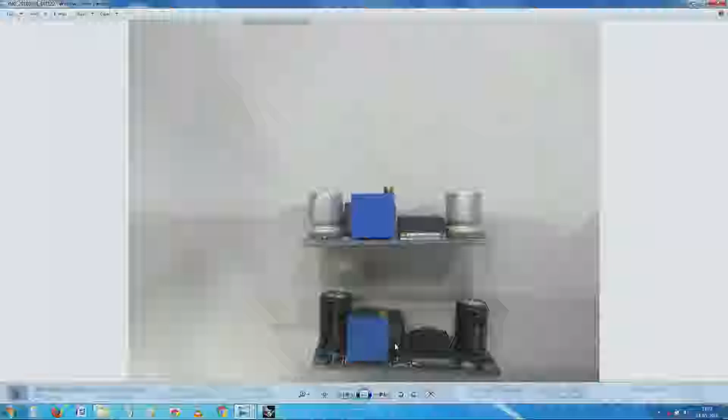And something related to this is the component build up. Have you seen here, this one looks like the top surface has been made flush, so that if you are to make an enclosure and it sits inside, it needs to be flush. This is what I was showing you earlier. The one I had showed you, I had made something for it where these capacitors are higher and then there is a small depression here.

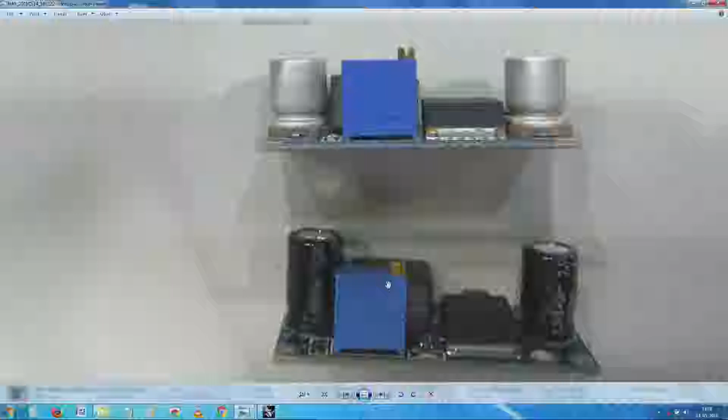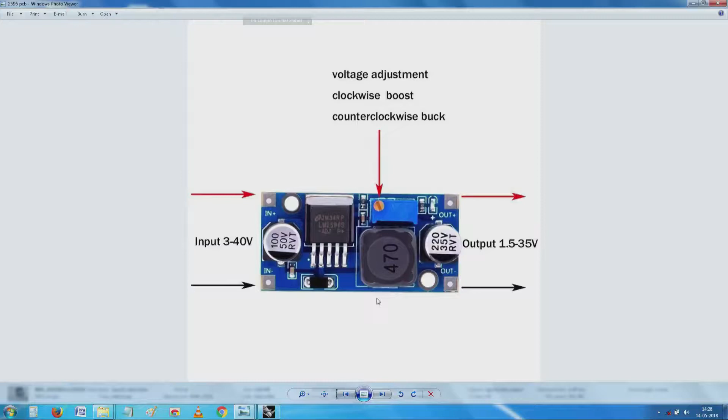Now coming back to the other one, yeah. You see here, that is that one here. If you see in the side view, this is depressed compared to the other one. So, this picture we have given here just seems to be the other way. It is not about the type of capacitors we have here, but it is about the type of the mounting holes. And then how do we go about building a circuit for this?

You have seen here, these mounting holes are in one line, while in this circuit they are slightly different. You see here, this is not symmetrical, though it looks a little like an object that could be made symmetrical, definitely not symmetrical. Because of trying to make it small, they have pushed one of these holes here, and another thing is this is exposed so that you can have a heat sink built into it.

So, I think I have already shown you this, and I would like to show you this comparative thing one more time. You see here, while it looks symmetrical here, this is not at all symmetrical. See, this one is here. So the net result is the PCB has been made a little smaller. Now, I set about trying to see whether I can make an optimized enclosure for it. The next small exercise, and hopefully when we go back for the printing, we can see what it is.

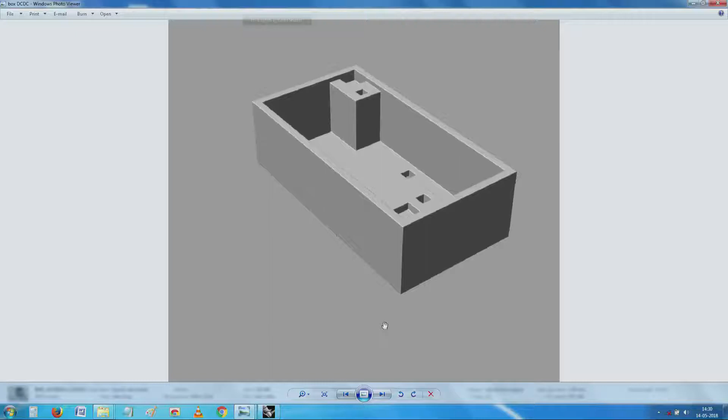Do you see something, I do not know whether I should say it is amusing, but what has been done here is to maintain perfect dimensions and make a 1:1 representation, a picture was taken. Normally this is where we have a little problem. If you notice all the pictures taken earlier, they have a perspective issue. Unless something is flat, you cannot take a proper picture. In this case, it is not just about being flat, it is about being aligned perfectly, because we want to make sure that the dimensions fit properly. Otherwise, we will end up with something very complicated and unnecessary.

You have seen this? I have a beautiful picture. This has been made because we have the printed circuit board, and it is populated, but not with leads through the whole system. It was put on a scanner and scanned. The advantage of doing this is now I have the perfect location of these two mounting holes, and something related to this is I have 4 places where the soldering can take place. And this is slightly different from what I showed you yesterday. What I showed you was this.

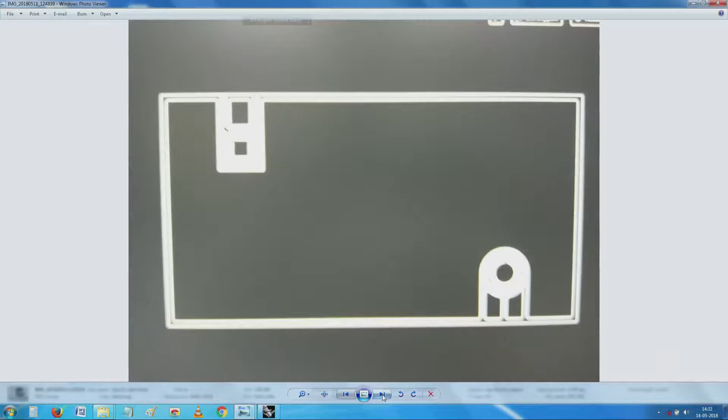You see here, I tried to make something which has a square opening here, and then we have some other thing, a round opening here, just to show you how the build up starts, how the material builds up and all that. This is sort of a recapitulation of what we started.

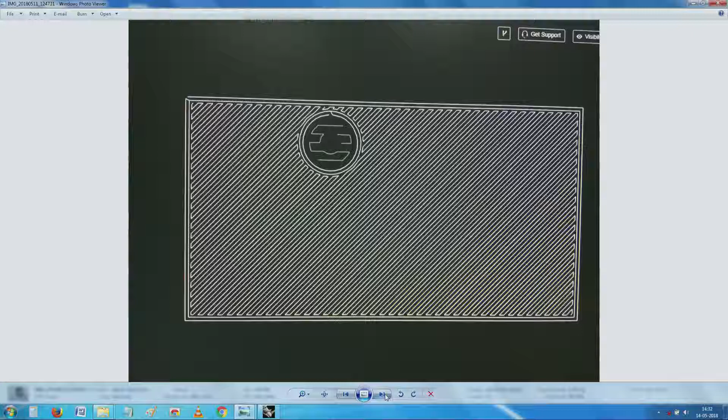So this is where the starting - what I call support material, a diagonal matrix like thing has been started, and on top of it the building has been done. If you see that continuous thread, that is where the material sits inside. So you see this is how the whole thing progresses, and if you get a chance and the machine is free, I will see whether I will be able to build something for you.

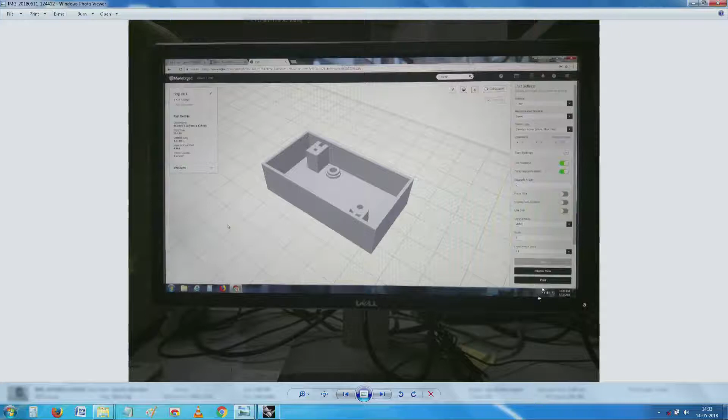And only as a starting point, yesterday I showed you this saying we can make a box here, and I even made a step there to see if we can optimize something. Now today I will go away from here and show you some other way of how we can build another enclosure. The starting point for this was as before.

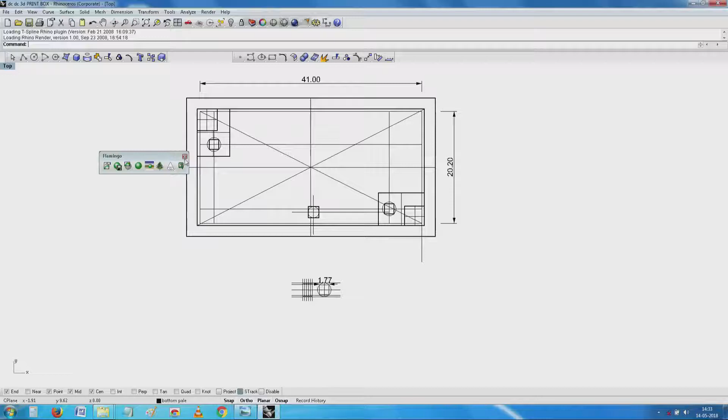If you see here, kindly have a look at my picture here. That scanned picture has been put on a print out, then we have taken the actual piece which needs to fit here, and I have asked my colleagues from the workshop to measure and jot down all the correct dimensions, perfect dimensions. If you do a mistake, it will not fit. Earlier we could afford to make things because there was always an issue of tolerances and fit and all that. In this case, no - we would like to be as close as possible.

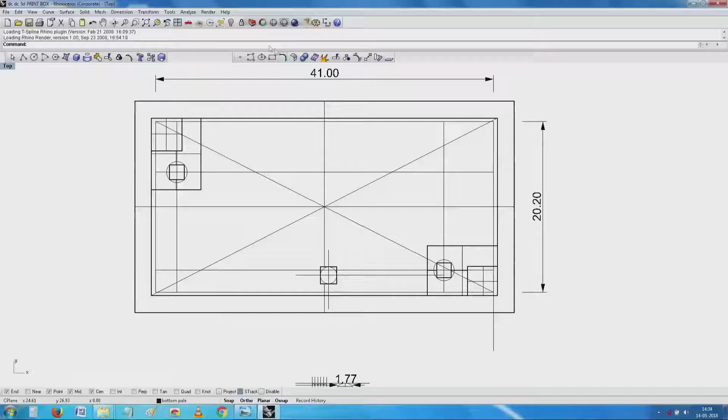So you have the printed circuit and this is the scanned and printed object. Now this object has been taken and placed here - I have placed it after making a rectangle of the correct dimension. I have a rectangle here - if you see, I have a 20 mm by 41 mm rectangle, which is what the measurement was made, and the whole thing has been kept at the back as the starting point of my enclosure design.

And you will notice that because we want to make things a little small and all that, I have just given the absolute minimum gap that is required, which is still integral with the machine and its resolution. So in this case, one side it comes 0.4, other side 0.5 mm, and I have a very good starting point to start.

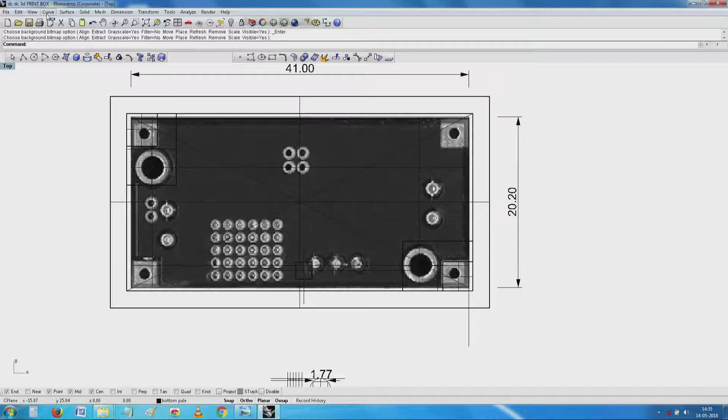Now if I hide this tracing bitmap, this is a very good starting point for me. You have seen here I have a circle which represents the center point of the hole, and then the hole arrangement outside. So I have a 20 mm by 41 mm rectangle, and all the various openings I want have been constructed here.

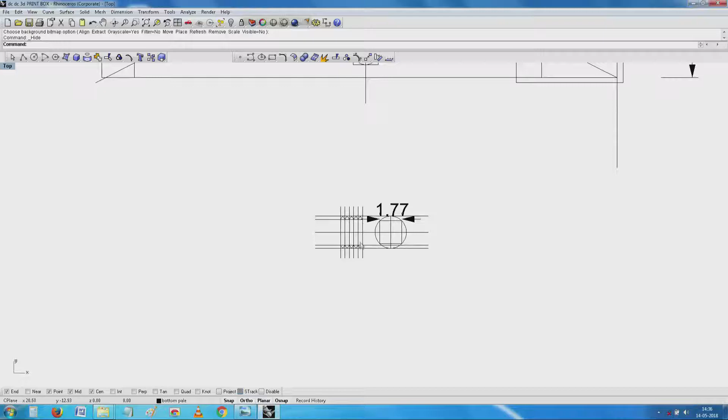Now if I go actually trace it here, something else I have done here. If you see, after checking, I had to go back and see what is the opening that they have given in the circuit board. The hole that has been given in the circuit board is a little more than 2.5 mm, so it may be 2.6 or so. It has been found that if I keep a 2.5 mm screw, it goes through very well. Now I look for a way of how to attach it down.

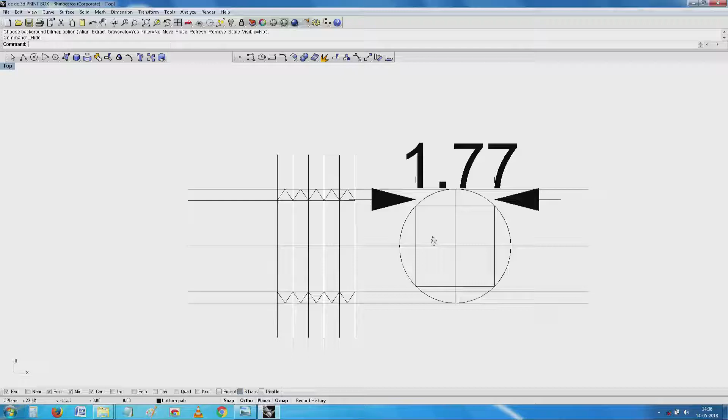As I have explained, slowly it will come together. I have put a 2.5 mm screw, and then going through the metric standards, I have checked and found out what is the pitch of it. The ISO standard says the pitch in this case is actually 0.45 millimeters. Based on that, the whole thing was constructed, and I have come into an optimum shape of a hole. We see the outermost represents the 2.5 mm.

So if I go and try to give the dimensions here - oh, I am sorry, it says R. I think I need to pick up the diameter.

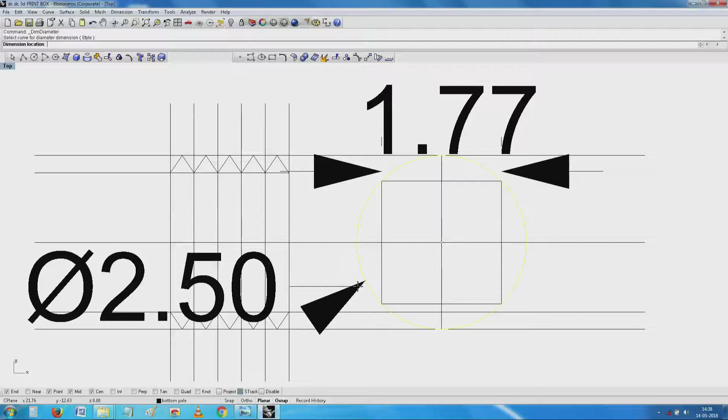It is a 2.5 mm hole, the 2.5 mm nominal diameter. In our metric system, the outside diameter stated is 2.5. By a little trial and error, something between this root, if we are to fully make what you call a pilot hole, the pilot hole would have come at that level. Instead, because I do not have a provision for that to sit here, I have decided I will attempt a square hole which is a little smaller than that, so I still get something which is not bad.

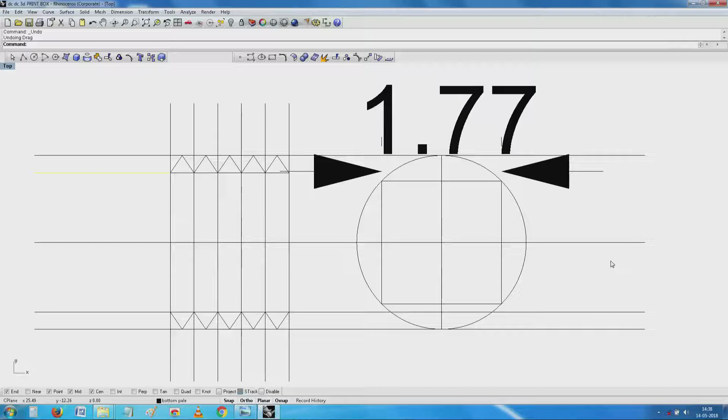So the pilot hole comes here. I have tried this square hole earlier and have come to an approximate size which is 1.77 mm. This has been the basis and starting point for my design here.

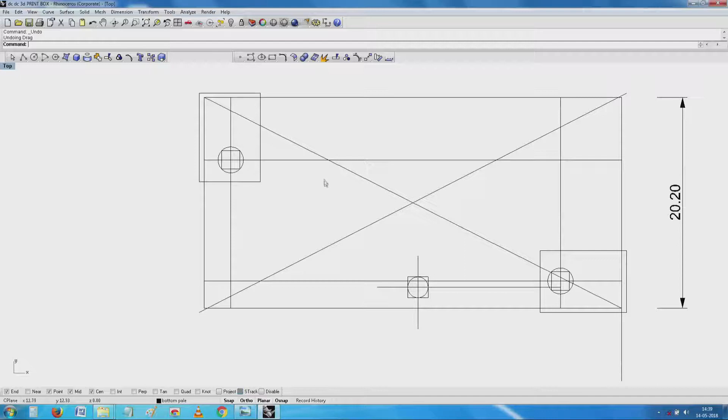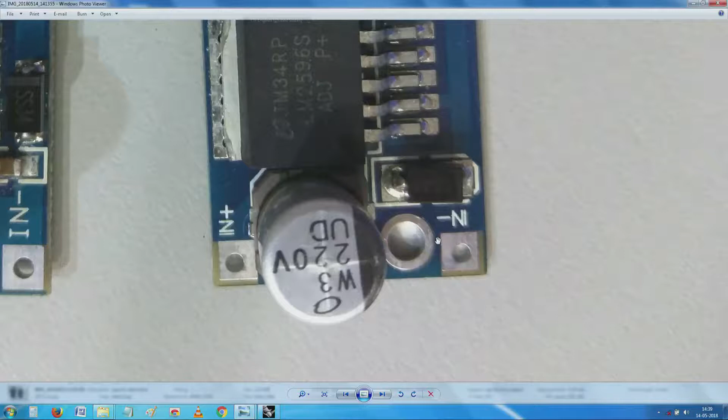Now this is where I need to take a very interesting build up, saying if you look at this printed circuit board which I have shown you earlier, one of the things you will notice, this is the one I am trying to build. See the small detail here. I need to support a hole here and I do not have much place here, very little place is available for me. Same thing on this side also.

If I come close, you notice that this surface mount device capacitor is the limitation here. The amount of space I have is a surface mount limitation. Similarly here I have a small SMD, another tiny, I do not know, probably it is a resistor, and within this is where I have to support this hole.

So I come to the dilemma, saying what do I do now. I have decided provisionally to make a square starting from here, going all the way from here to the other place. And then what do I do about this outside soldering? I have decided to relieve that thing to a small step, so I end up with a rectangular piece which can go and attach itself to...

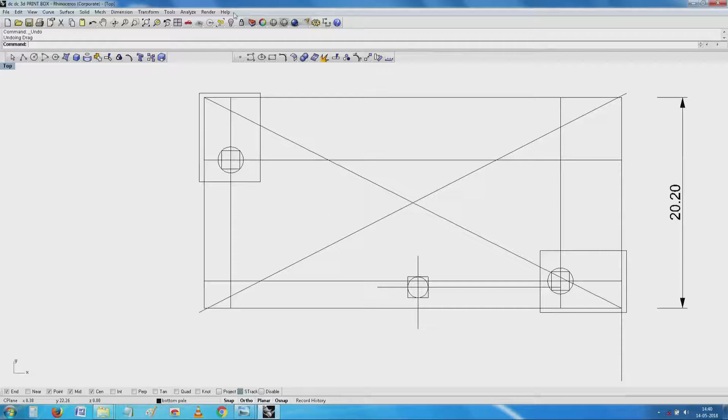Seen this here, no. Now I will unhide these items. Now you see here I have a box and this whole thing gets attached here, and the square corners represent the holes in and out, openings like that. I have this issue of having to worry about it only at two places here and there, and at these two points it is not a big deal at all, because there is nothing which is occupied in this.

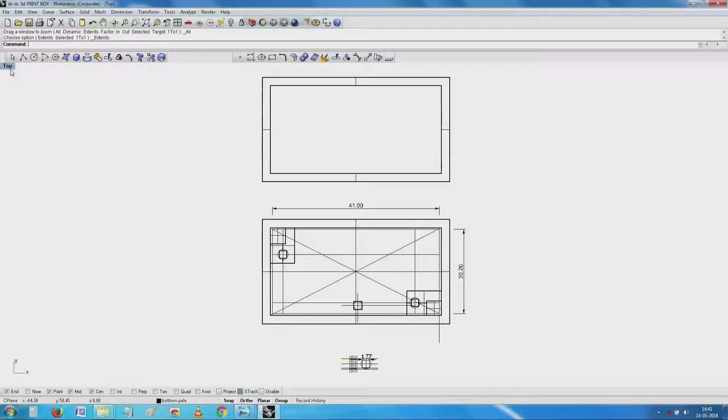So now, if I build based on that, I will have a beautiful enclosure which is built here. In this it looks like it is very easy. Depending on your patience, I would like to still show, perhaps in case you are interested, on how this whole thing has been built up. In this case it is very easy.

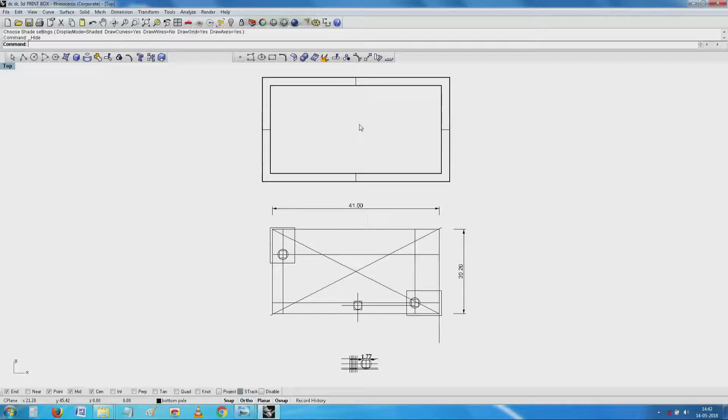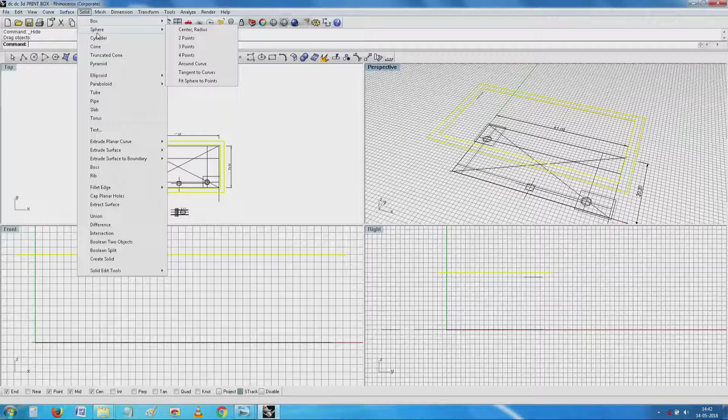See this, no, I have a box. This is the box which sits here, nicely it sits here, and then it has been converted into a piece like this, which can be happily extruded. This being a... hey, it is a cinch. Without too much of an effort, I have a beautiful box getting ready.

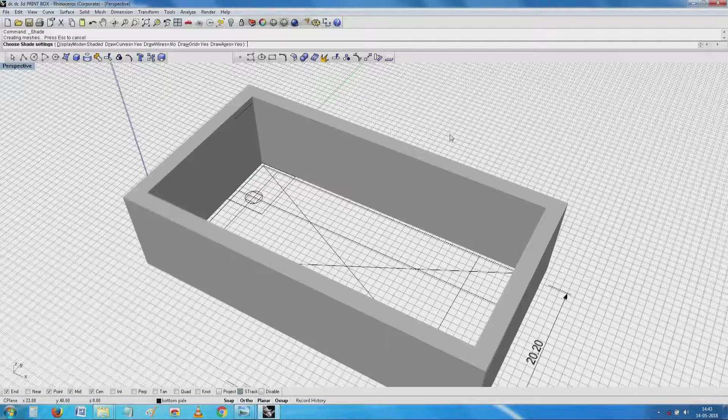In this I have it, no problem at all. And then if you remember, in this corner I had created something else here in this corner. See here, this one, same way I just need to extrude it out.

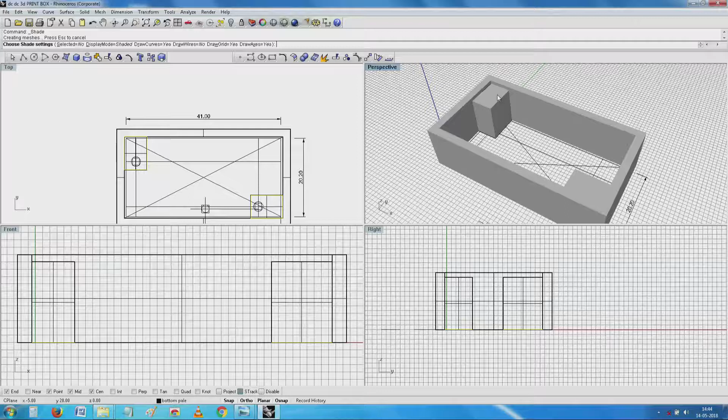Interesting, very easy. Once I get all the dimensions and already, making anything like this is extremely easy. Now we come to the other two points, saying I have two small square holes which need to be made.

Oh, I do not know what to do about it, somewhere it has got locked. You see here, at the base of it I have this small square hole. So I have similarly, I have this another square hole. Now I try my best to take it up and see.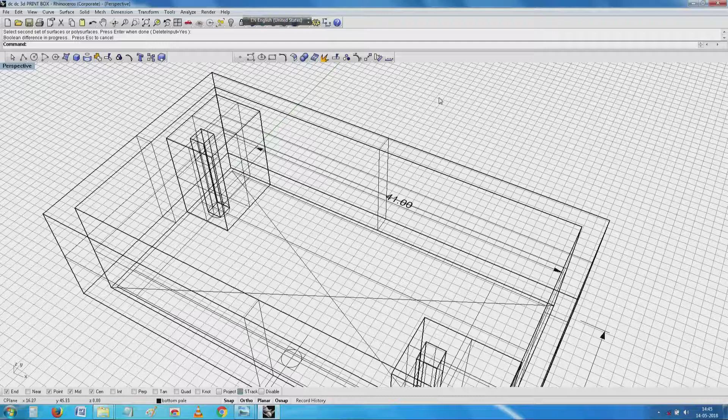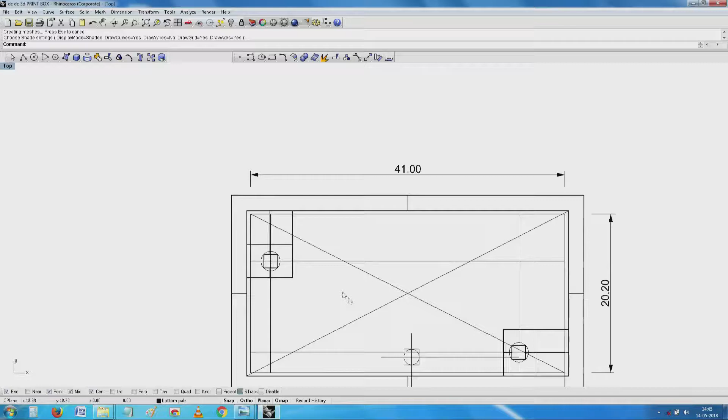Oh, it is really a cinch. I have got this. Life can't be easier than this. Now, if you remember the corners, I still have the issue with the corners, saying somehow I need to make a place in the corner. I do not know whether I have the information here, or maybe information is lost, but still nothing is lost as such.

For me to give a small relief in the corner, it is very easy to make a small solid, a box. See, I have got this nice box which I can use for removing material. I will copy it again here and see whether, if it is a symmetrical object, it will be useful for me. It does, it is useful, not very symmetrical, maybe I should rotate it. Hey, it is symmetrical, who said it is not symmetrical?

Four and a half millimeters, 4.4 millimeters, not bad. So I will just leave it like that, I will take it here.

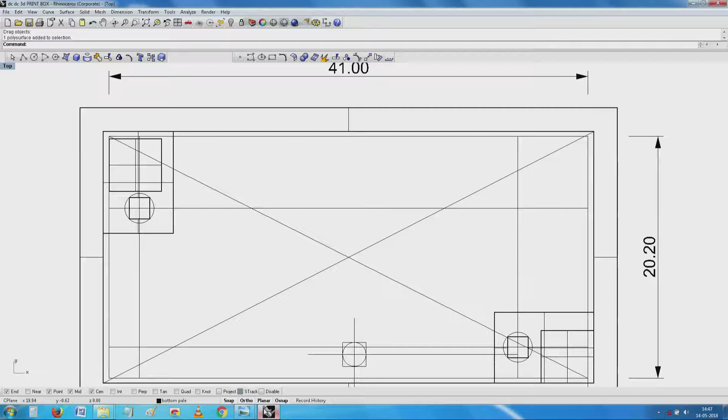Good. So, right now looking here, see this, I have the small thing on top. I will now try to use this and try to make a depression on top.

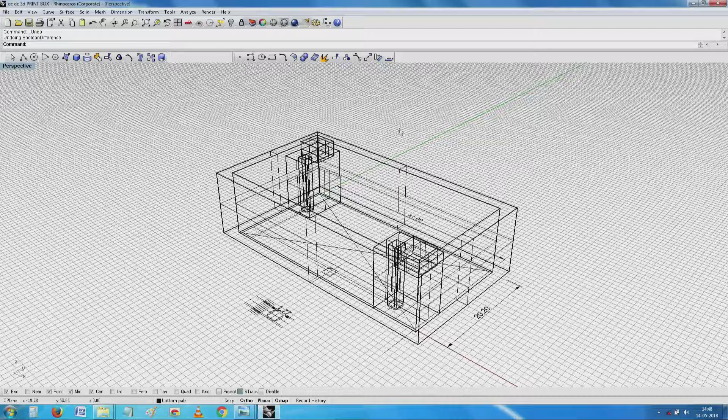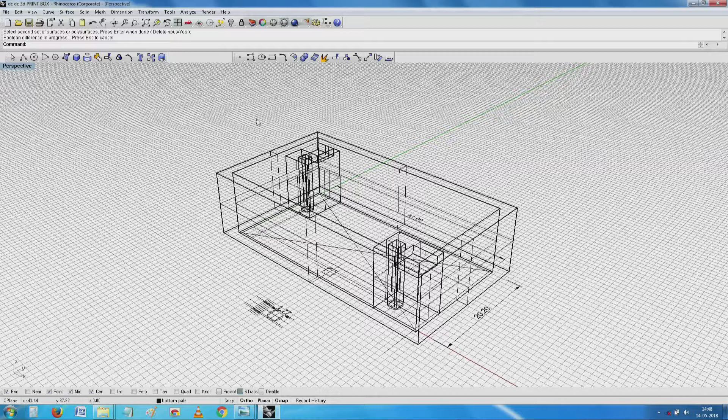Achieved. So, I have a beautiful device which is ready, and I need to do something to make sure that it works properly. Only thing here is at this stage I tried to stop it here because this can be used for both types of printed circuit boards when made in parts, so that I can use it as a universal thing henceforth.

If I have this corner support, I can use it for any printed circuit board. Any printed circuit board I have which involves a similar type of thing at the corner, I can just put it and make a relief and so on.

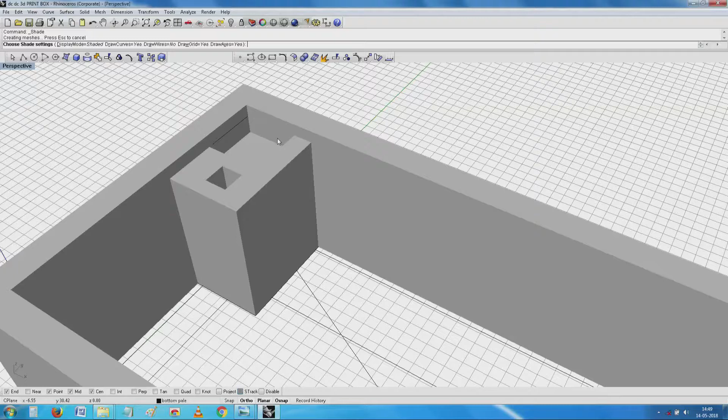One thing you will notice is no detail has been shown here as to how the wires will be taken off. One of the best ways is probably to take a U shape here and take the wire here, or depending on what it is. Normally that is what we will do here. We will take a small cylindrical shape somewhere in one of these places.

I will see if I can make a solid which is typically a cylinder. In this view, I would like to make a cylinder which is typically - if I see here, it shows this is a 2 mm hole, this is a slightly bigger hole.

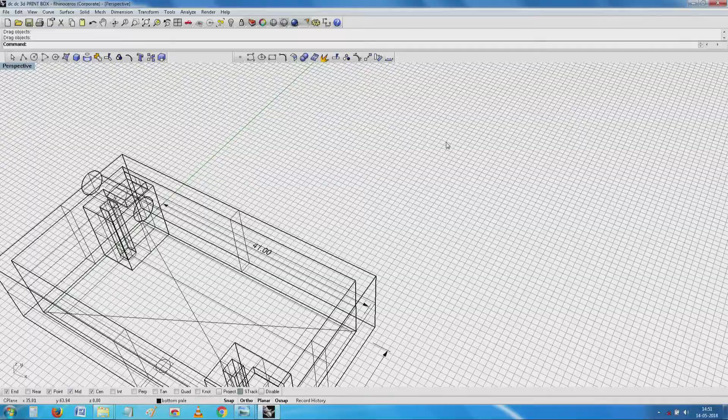Again going by the same earlier approach - do we need to make, if you make a circular hole where it is convenient and the wires can all sit there, we still have the old problem of when things build up, how the slicing is done and how the things are built up. So it is not a very good idea to start with circular things, because we end up with a support, and then the moment the support issue comes, we will need more and more material to be stacked and so on.

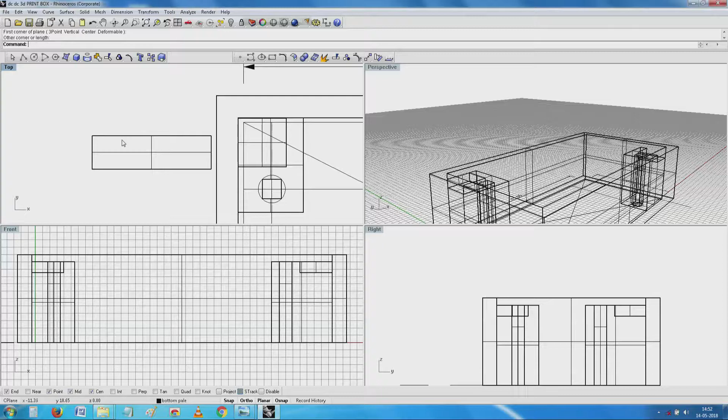So, in fact, I can probably do much better without this, and instead make a rectangular opening here, which is very easy for me. So I go back here, look at this, try to make a surface which is a plane. The rectangle can just be this - this is the plane, it is sitting at the bottom here.

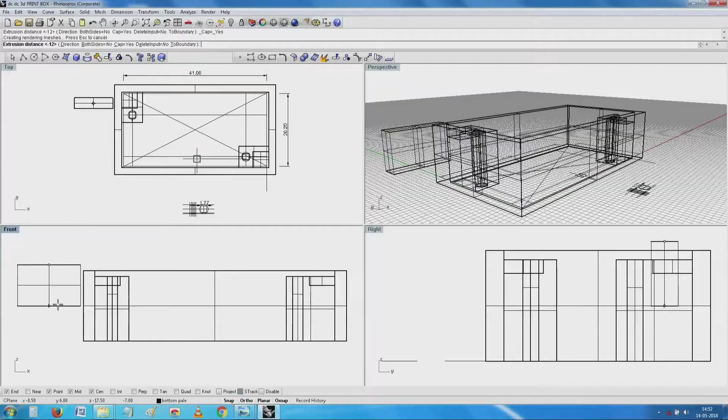Bring the plane here, try to extrude it down. See here, now I have a chance of making a simple notch, which is a square or rectangular notch. Now, I will copy this notch in all the 4 places.

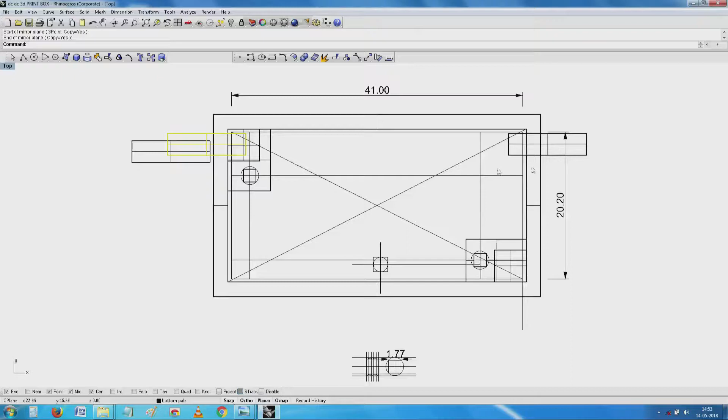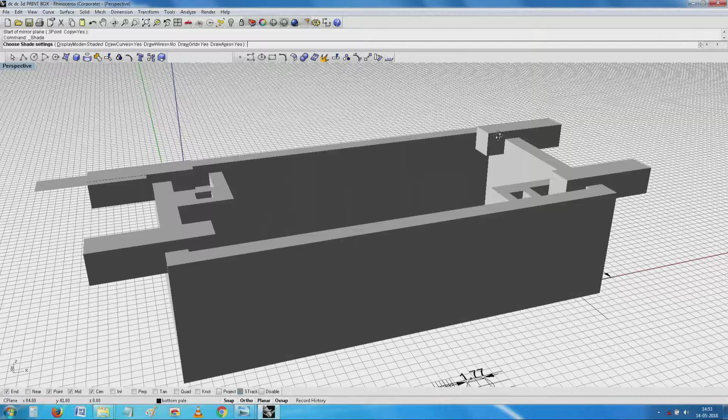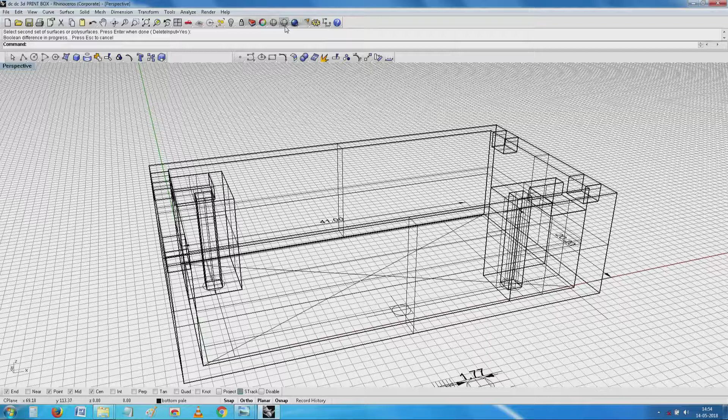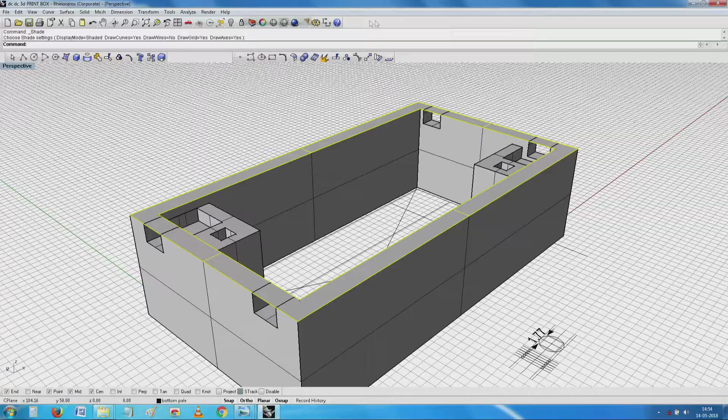So, going back to the perspective view, I have managed to achieve 4 openings. So it is easy for me, I go back to solid, I make a difference - my unit is almost ready. See this? Easy for me, life is probably.

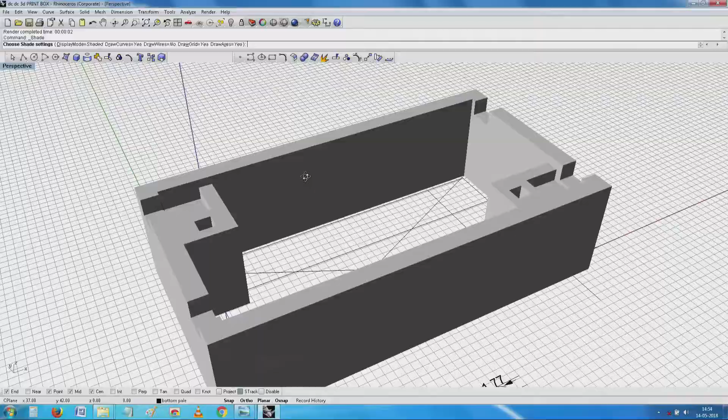Now, if I go here and try to - see what a cute object it is. Now, when I want to build it, depending on the way I place the components and so on, it builds easily without the slightest issue about it. It will start at the bottom and then slice by slice the whole thing builds up. This being square, overall build is going to be very easy.

So what I will do is I will now save, open one more which I have created earlier, and then I will show you how the slices are going to be built here. This one is a little similar to what I have already shown you earlier, except that to demonstrate how the slices are built up...

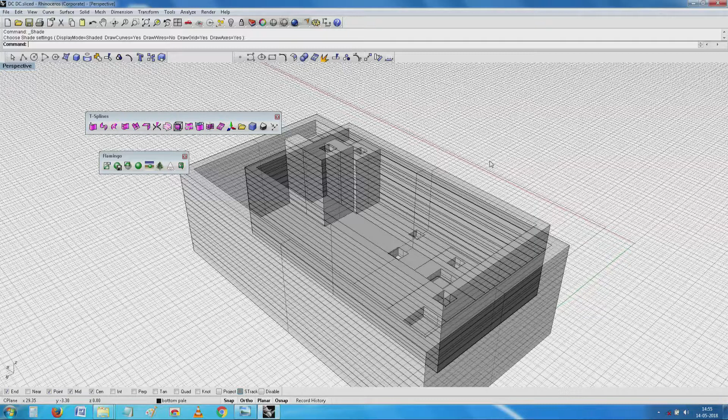I have cut the thing into the various types of slices, and one after the other you will be able to see - oh, there is a hang up.

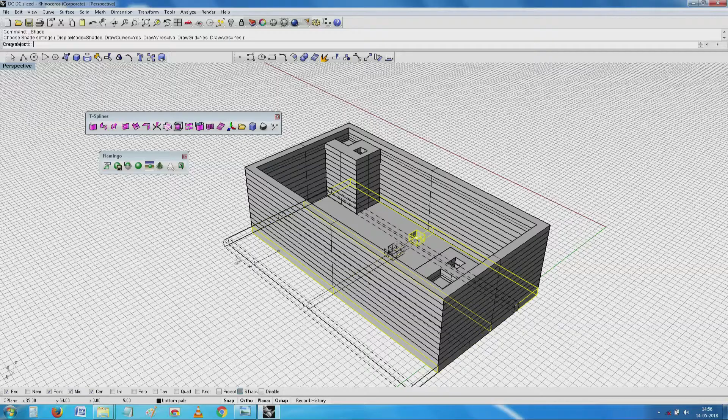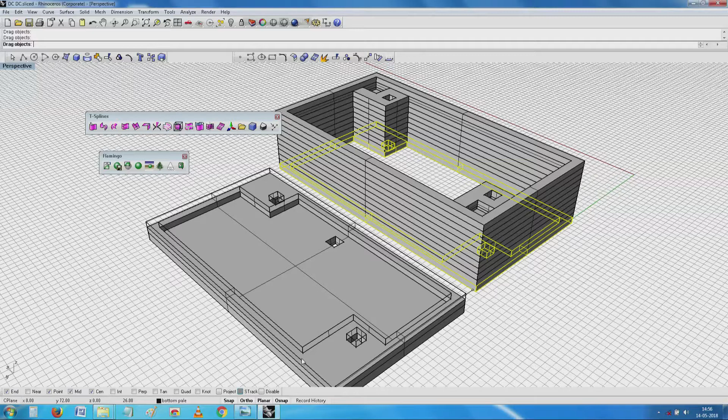First slice, the layup is going to start like this. So if you see the layup, the whole thing will be filled one after the other, the items will be filled. After that, next one if you see already, next bit of a thing is being built here. Now you will notice that nowhere there is any undercut that has been given here. You understand? All of these, one by one they will all build the easiest without the slightest problem. You can see that the whole thing is being built like this.

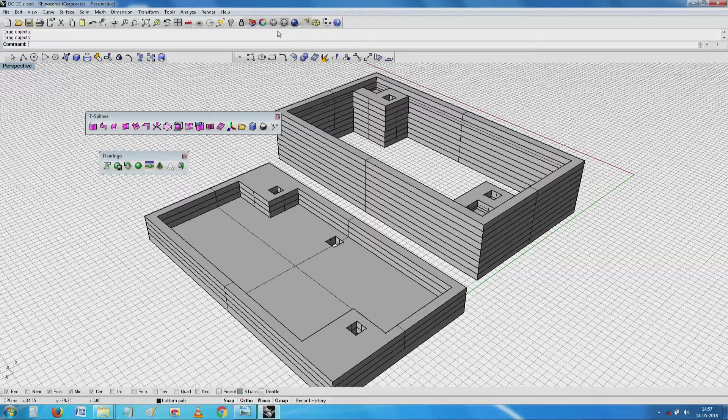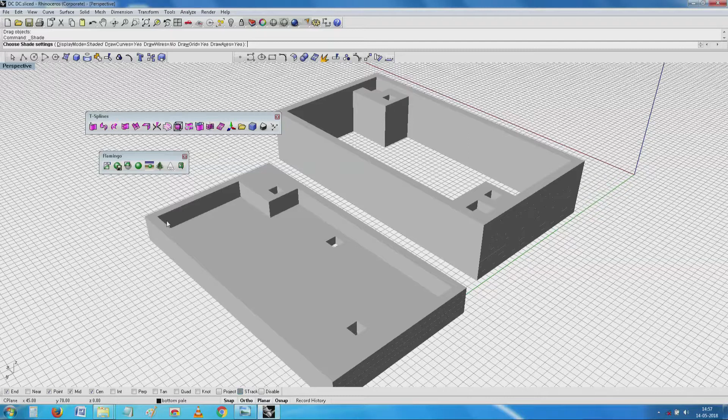So I will drag the whole thing here.

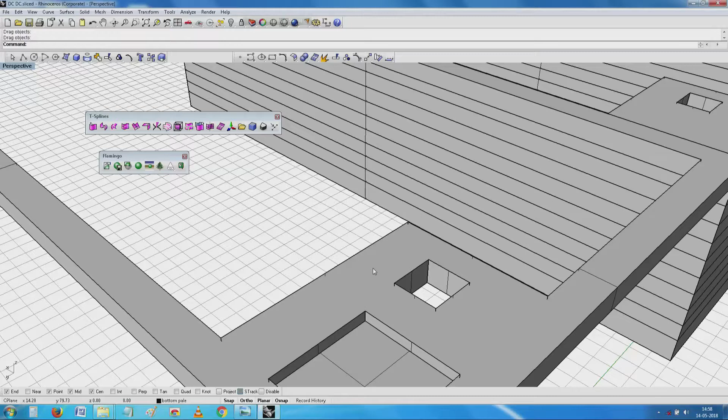Now, we come to the last three where there is a small difference. Can you see here? This is a partly closed thing here. You will notice that when it lays up, it starts laying up, but then about 1/3 or 1/4 of it, already a depression has come here. So, if you see here, this slice alone is likely to look like this, and when these slices build up one over the other,

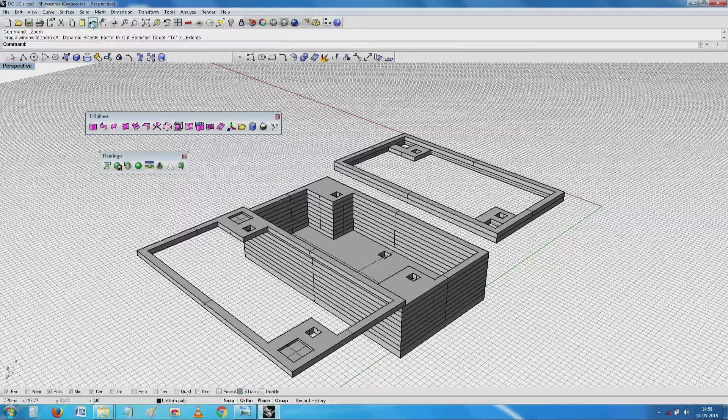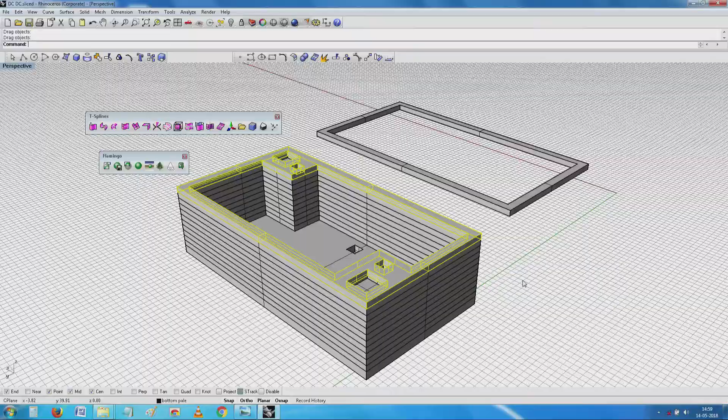see, the first thing has started. This is almost complete the way we want now. All the detailing that is required has already been fulfilled here, and see this, we have a beautiful thing, except what is it that I did not have? I did not give that rectangular opening. I have a reason for it.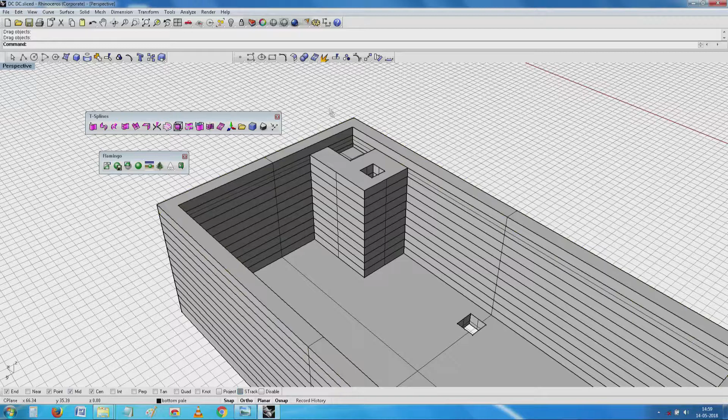One of the reasons being that I may not want to have the holes directly here and the circuit coming from here. I would not mind having the circuit being, see, this is going to be like this, and then I have a cover on this. If you remember, I said I am going to have a heat sink on top of it. So, after putting all these things here, after my trial is over,

the second object which I am going to print will probably have to decide: would I take my wires from here by drilling 4 holes in the aluminum, or will I make anything? That I need to do after the first assembly is done. The second print is going to have it, and in the unlikely case, once I put a heat sink on top of it, I can drill holes on the heat sink and have these wires stick out.

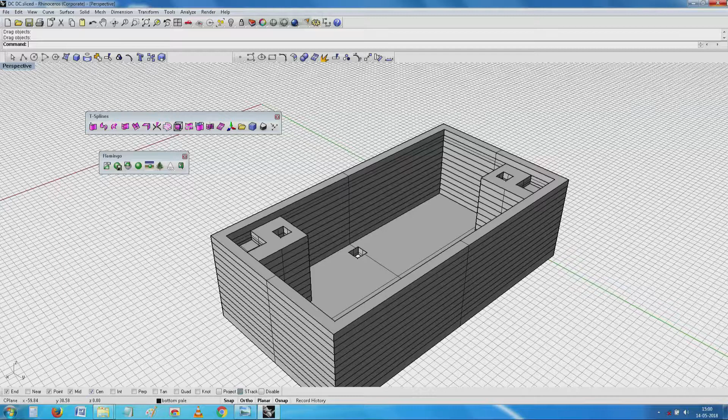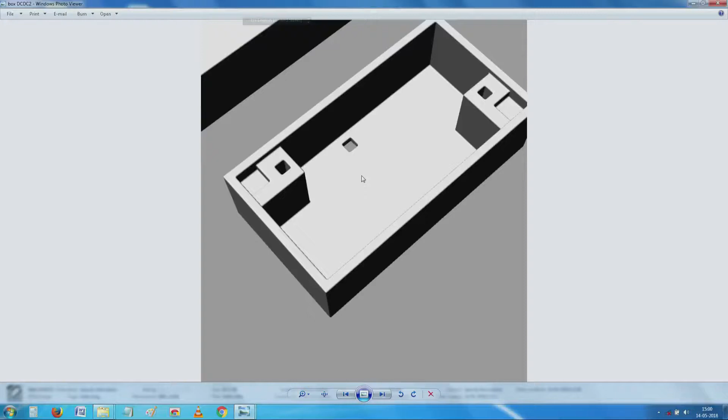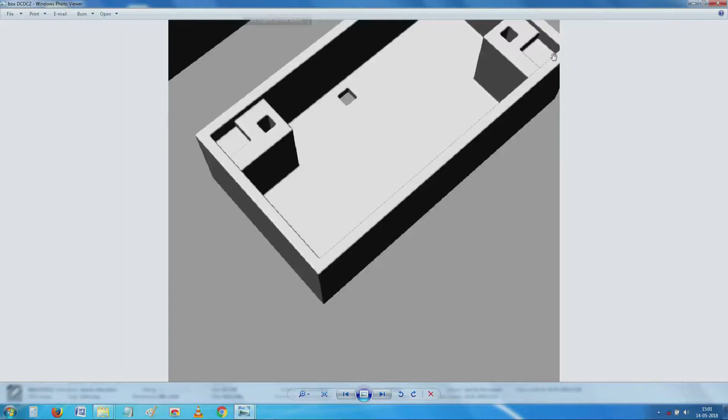Alternatively, it is very easy for me to file out 4 openings here and make it. So, intentionally I have left it here. So, the next one is going to be this, the fairly completed object. Can you see here? To make this thing interesting, I have given a small radius here. As humans, we can only perceive objects when two surfaces meet and the highlights are caught here. So, a beautiful highlight is being caught here, and because of that this object looks more real than a simple flat rendering.

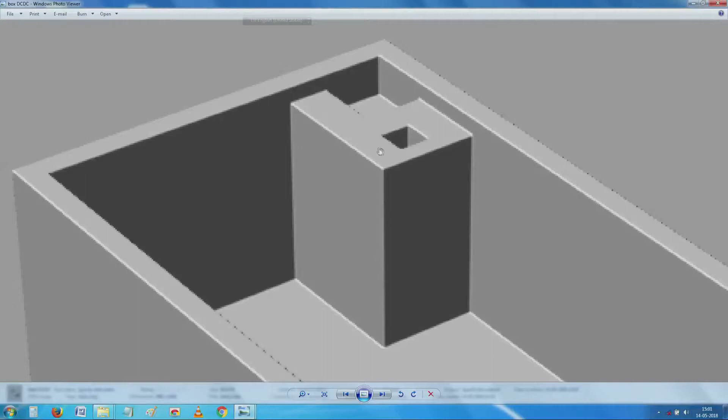So, this is a flat rendering, okay, and you see here small corners have been given here. This looks a little more natural. Once the printed circuit board is kept, and after that I clamp these 4, I decide what to do with it, and then on the other side I have this hole. If you notice here, compared to all that fancy depression, this object is going to be much easier to lay up.

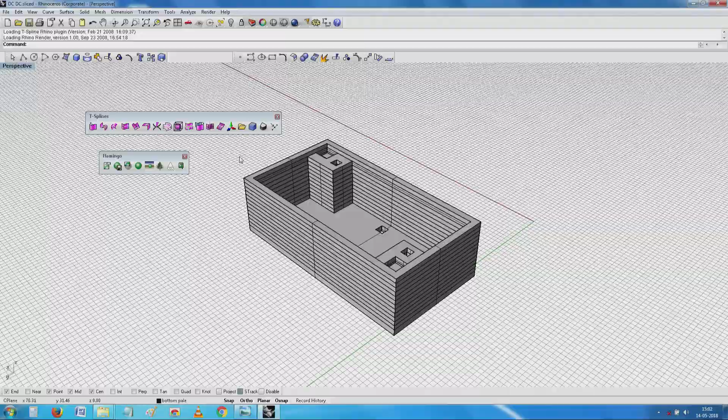So, it's extremely tiresome for you, and maybe a little bit tiresome for me also, but you see in the end we have these; if you try it you can't be wrong. See here, nice, the only thing I can say is nice. And even if you were to make an object, very rarely will this object be smooth the way it is here, because remember what you are laying up is still a tubular structure.

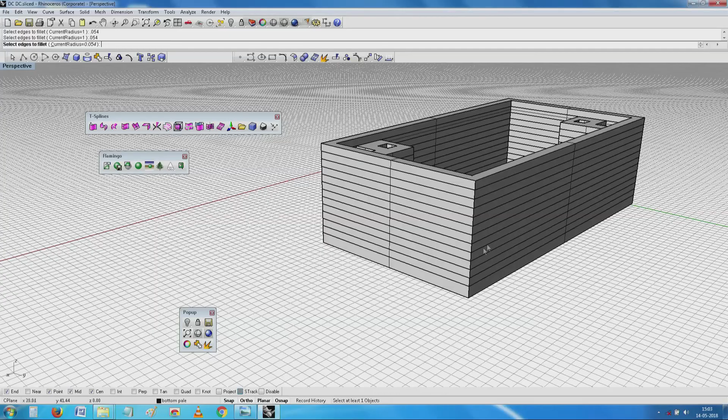So, in reality if I now use very thin filleting, I will probably be able to make out a little. It is intentional. Intentionally I am making sure that I will not pick

My computer is slow. Oh,

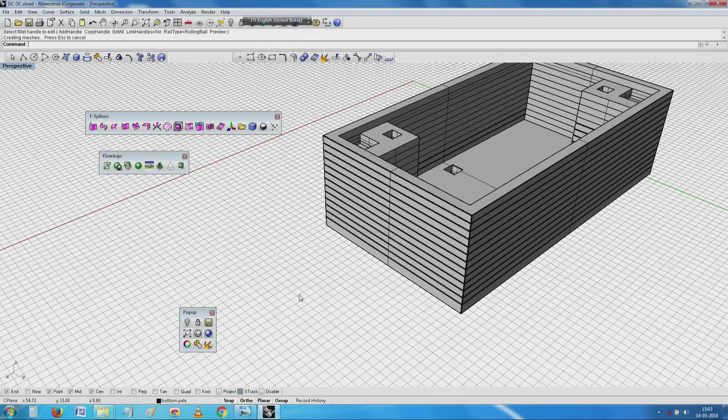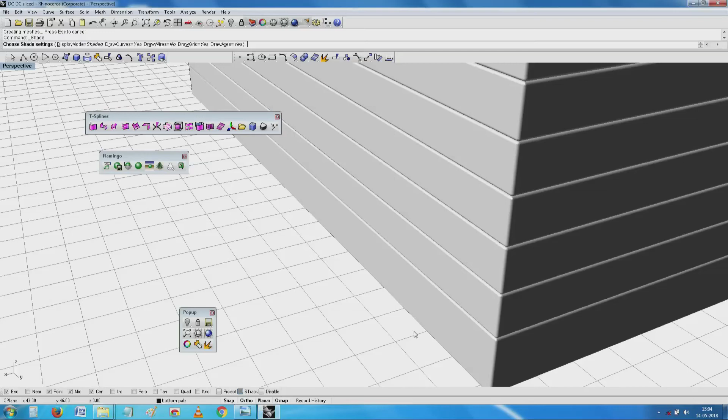finally, any object that is going to be created in 3D printing will have this little bit of granular structure. This of course is unintentional; with respect to each slice the radius is very small. So, you will not have them like slices, but you will have a large number of grooves on top of it. See this, this is going to be my final object.